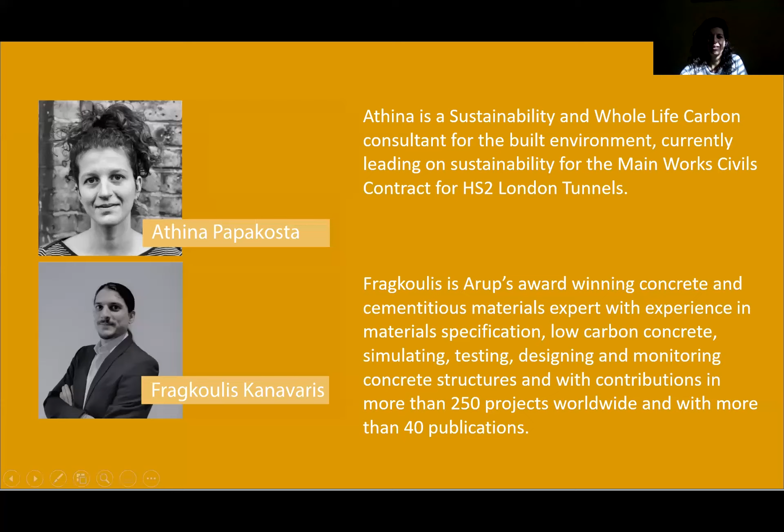Lovely. Thank you, Susan. I will quickly share my screen and make it start. So, right. The pains of having too many windows open. So there we go. I hope that you can see my screen all right.

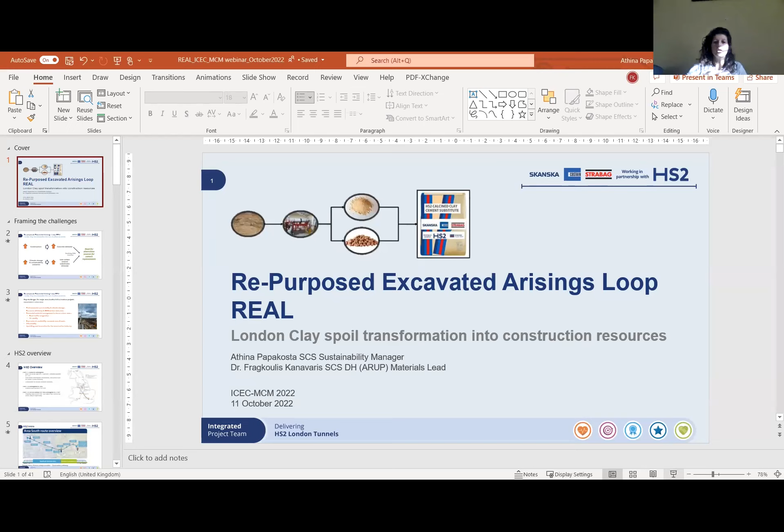So as Susan mentioned, we're going to have a quick recap, a quick summary on the so-called REAL project, which is the feasibility study we're running as part of the HS2 delivery contracts to look into how London clay spoil can potentially be transformed into useful construction resources.

So a bit of background on that, which may as well be common knowledge to most of the audience. Growing construction globally means growing demand for concrete. That is one of the building blocks of construction. At the same time, increasing sustainability and planetary change challenges in our environment, with climate change being one of the most salient ones in our days. These in turn dictate more low carbon, more environmentally friendly solutions.

Looking at these two in conjunction, the need for robust concrete materials to essentially keep supporting global growth and also go hand in hand with sustainable development and the provision of lower carbon alternatives in order to meet the requirements to reduce and minimize our emissions and reach net zero by 2050, we're faced with a particular problem in the world of concrete. We have to look into solutions with alternative cementitious material, given that cement is the most carbon intensive constituent in our concrete.

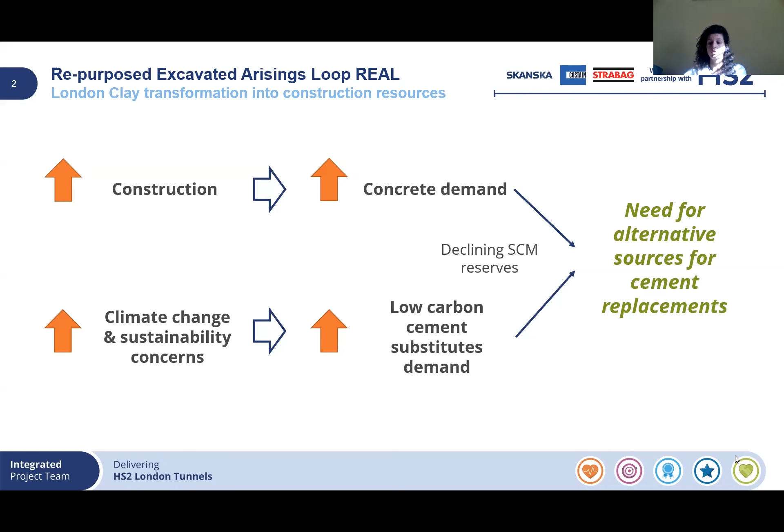So moving on, when we're looking at infrastructure projects specifically, moving away from concrete as a whole, there's also a number of major challenges, as you see on your screen, that have to do with the overarching environmental sustainability and climate change aspects that revolve around overall resource efficiency and carbon emissions, and excavated material management, which can get even more tricky when we're dealing with urban and densely populated areas.

This obviously leads and links into road traffic congestion, air quality considerations, so on and so forth. There's also obviously the challenge, especially when we're talking large scale, with raw material availability, there's affordability, there's also upskilling and innovation that is in dire need in the construction industry. So very broad brush lines with regards to infrastructure projects specifically.

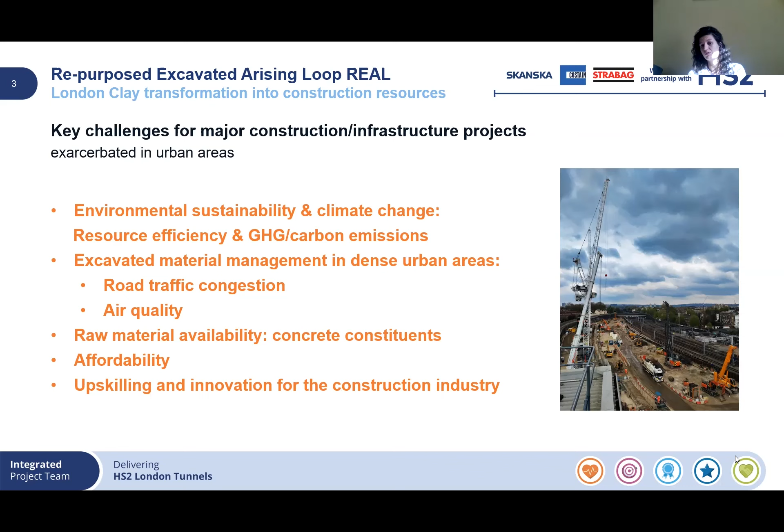Quick introduction to our specific infrastructure project that is essentially hosting this feasibility study. We're looking at HS2, a key infrastructure project, railway project currently underway in the UK. Phase 1 is down here linking London Euston to Birmingham. Few more details on the left-hand side. So currently we're talking essentially this stretch down here, and our particular contract is linking London Euston to essentially the

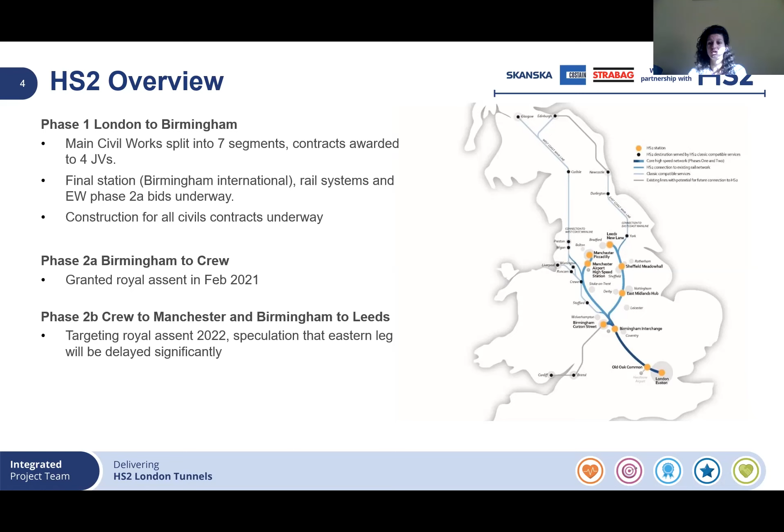northwest end of London. And as you can imagine, it being so very densely populated with not much space above the ground, our project consists of mainly tunneling works, and hence excavation material is one of the key aspects we have to deal with.

So zooming into the stretch that we're dealing with, this is just a more detailed overview of the project, which is pretty much tunneled from the beginning at the Euston station all the way to pretty much the end, where trains come out of the ground for a very small stretch, and then we're handing over to the next contract. So as you can imagine, around about 40 kilometers of tunnels, associated shafts, a lot of excavated material.

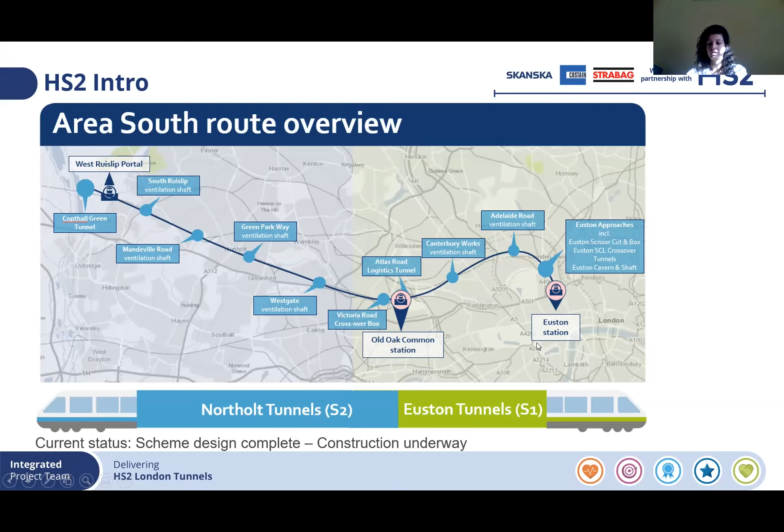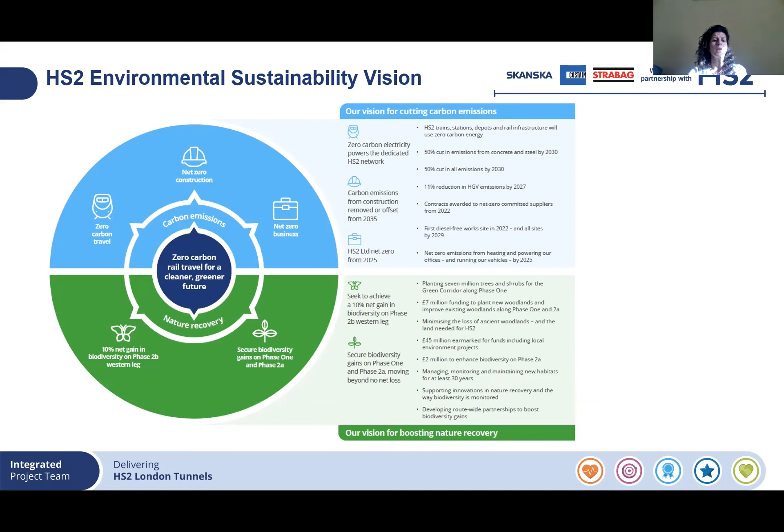HS2, as the client and as the entire program owner, in their own right have very high ambitions with regards to the environment. I'm not going to dwell on it too much. I'm just going to highlight that there's specific rigorous considerations, targets, and requirements, specifically around carbon emissions and nature recovery, including resource efficiency. There's also a net zero carbon plan available in the public domain for more details, so on and so forth.

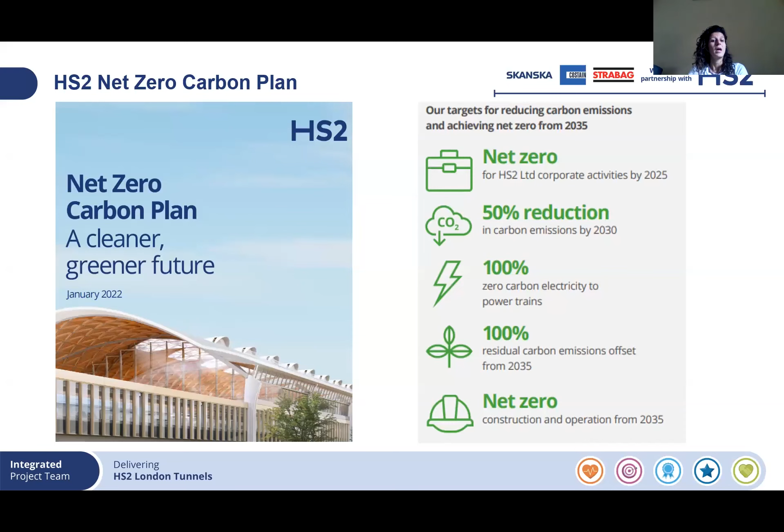All this just to stress that there is a strong drive over and above just the ambitions of our own joint venture and our own parent companies, from the client as well. That is very important and is supporting innovation projects like the one we're going to talk about. So a bit more specificity on the client drive.

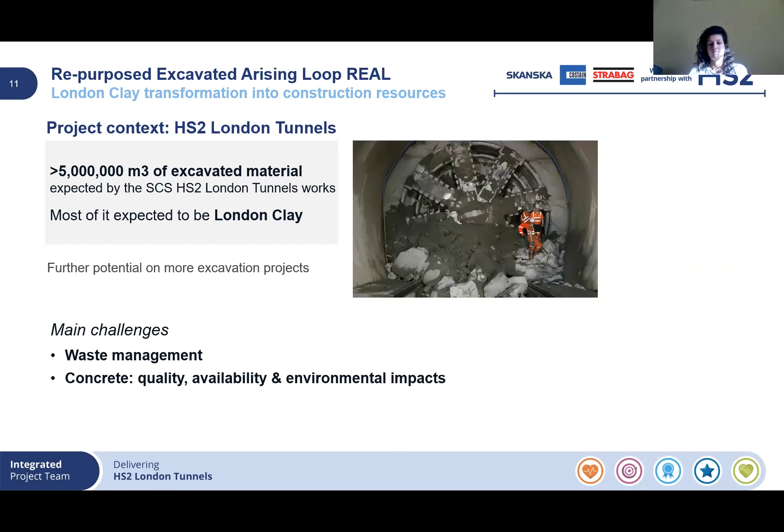So focusing on what our specific parameters are, we're talking around about 5 million cubes of excavated material for our project. Most of it, given the location, is expected to be London clay. So main challenges we have to deal with is obviously waste management, excavated spoil management, as briefly touched upon earlier. And of course, we have a huge demand for concrete to build the tunnels and the auxiliary structures and the heavy geotechnical structures to support the function. So concrete comes into play in terms of quality, availability, and of course its embodied environmental impacts.

So key objectives when we started looking into this feasibility study had to do with these main challenges. So we zoomed into how can we make the most out of our excavated spoil, that is London clay in this particular case, so essentially waste repurposing. And should we be able to make something useful out of it, we would be offsetting the use of imported materials with site-won ones, and therefore avoiding waste and the associated disposal, with the accruing benefits around resource efficiency, carbon emissions reduction, potential for cost savings and improved air quality, and less nuisance for the surroundings.

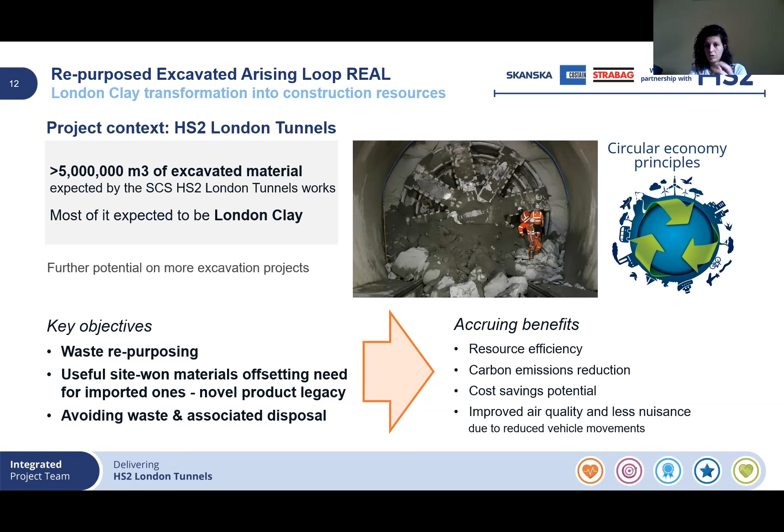So following basic circular economy principles to make the most out of what would otherwise be pretty much a waste stream, our London clay excavated spoil. So, as mentioned already, we wanted to investigate the potential of turning this excavated London clay into useful derivatives for construction. Main focus resides with supplementary cementitious material, that is calcined clay, and calcined London clay in this particular case. Frag is going to go through a lot more detail around calcined clay per se, but this is just to state that this is a main focus.

We've looked into expanded clay as well, that can be used as a lightweight aggregate, and have actually had quite promising results on that front too. But with respect to our particular project and the scale of the global challenge, concrete and therefore the supplementary cementitious side of things, the calcined clay, is bearing the lion's share of our attention and focus at the minute.

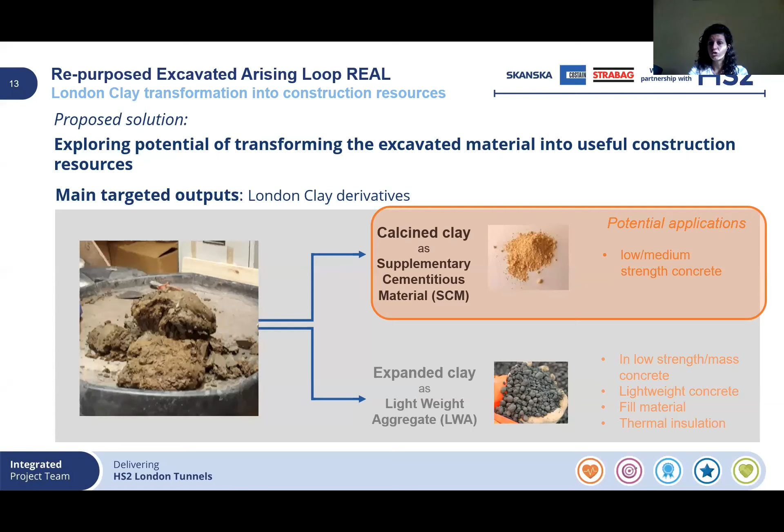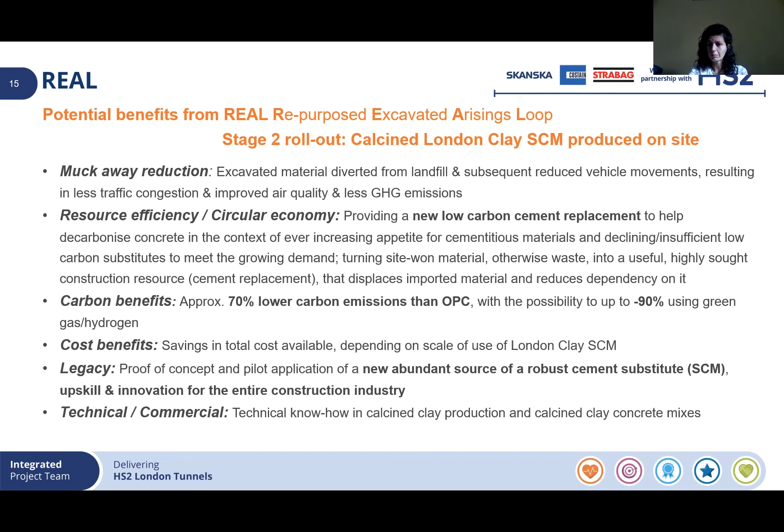So moving on, again very quickly, key benefits that I've already touched upon around muck-away reduction, resource efficiency, embodied carbon reduction, and potentially cost benefits and legacy, as well as technical upskilling advantages. So in order to look at this in more detail and more systematically, we have drafted this modular feasibility study to delve deeper into the potential of London clay.

And during that stage, we tested several samples of London clay with regard essentially to the material characteristics and whether they would actually constitute a good source for calcined clay. So we tested around about 10 samples from across the stretch, and got pretty promising results, which allowed us to move into stage 1B that is currently ongoing, which is the actual concrete feasibility study, where we essentially got bigger quantities of London clay, this time from our works, to rerun material characterization to essentially verify the prior intelligence,

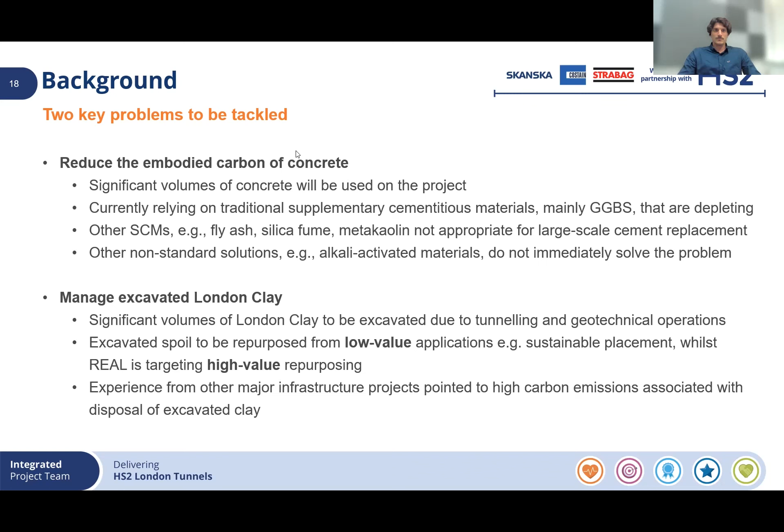Next slide, please. Yeah, sorry, maybe we'll have some delay, but that doesn't matter.

So when we were thinking back about the possibilities, I think it was already 4.5 years ago, we were thinking, what can we do with that clay that is going to be excavated? We were aware of previous work using that particular clay to produce expanded clay aggregate, not necessarily for use in concrete, but for other applications. But we had the idea of investigating the clay further and calcining it to use as supplementary cementitious materials.

So a lot of people and partners, when they heard this idea, were not very supportive or very happy, but it wasn't something that came out of the blue to us. We had past experience and past evidence of clays being used as supplementary cementitious materials. Calcined pozzolans from the ancient Roman and Greek times. In Brazil and generally South America, calcined clays were used in massive concrete structures like dams to fill large concrete volumes. We have been using metakaolin.

Oh, sorry. Could you please mute your microphones?

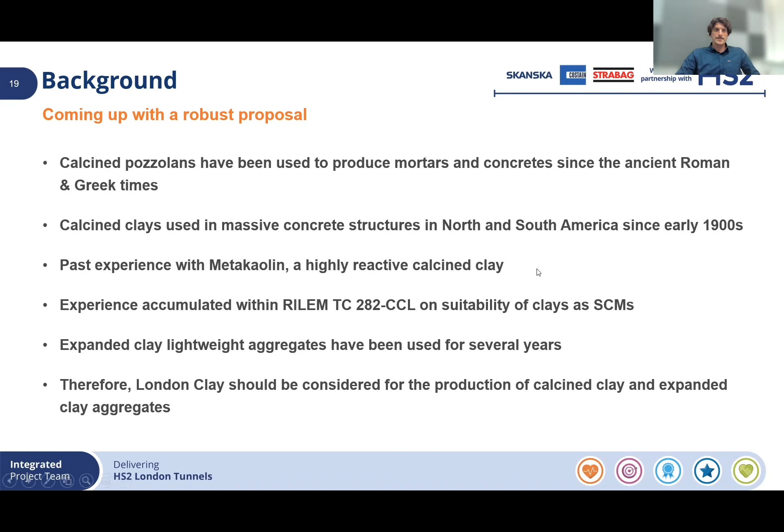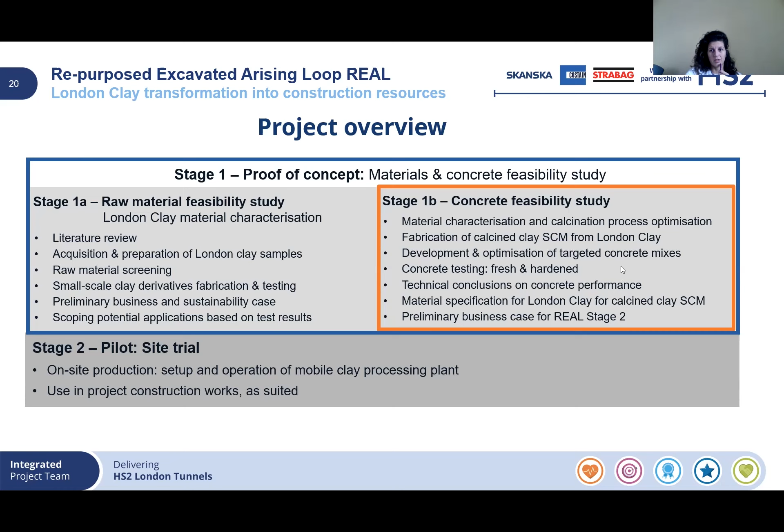Sorry about that. It takes its sweet time for some reason.

Sorry, could you please go back one slide? Sorry about that. I was trying to be proactive.

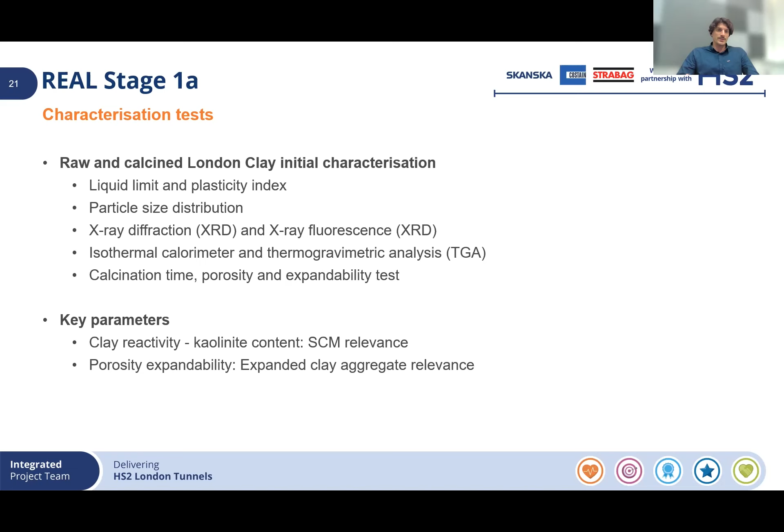So the key parameter for supplementary cementitious materials for clays is the kaolinite content, because this is an indication of the reactivity of the clay and how feasible it would be to use the clay in concrete. And the parameters which are key to expanded clay aggregate production are the porosity and expandability. So now we're moving to the next slide, where we see some of the first results that we obtained a couple of years ago.

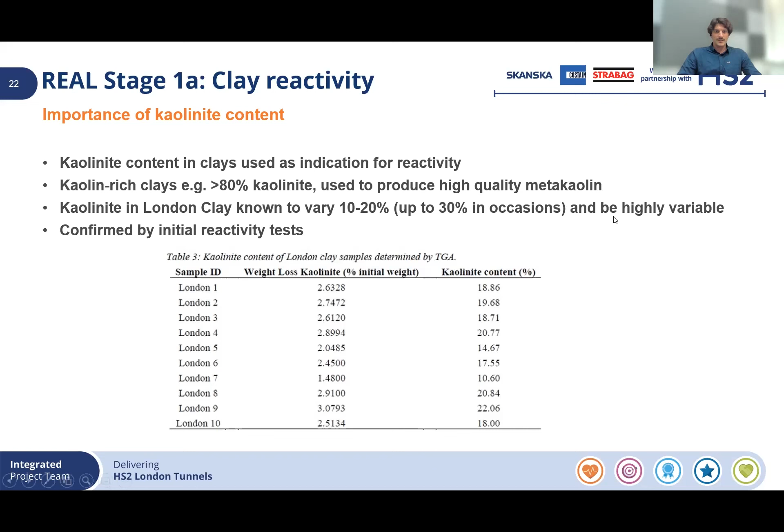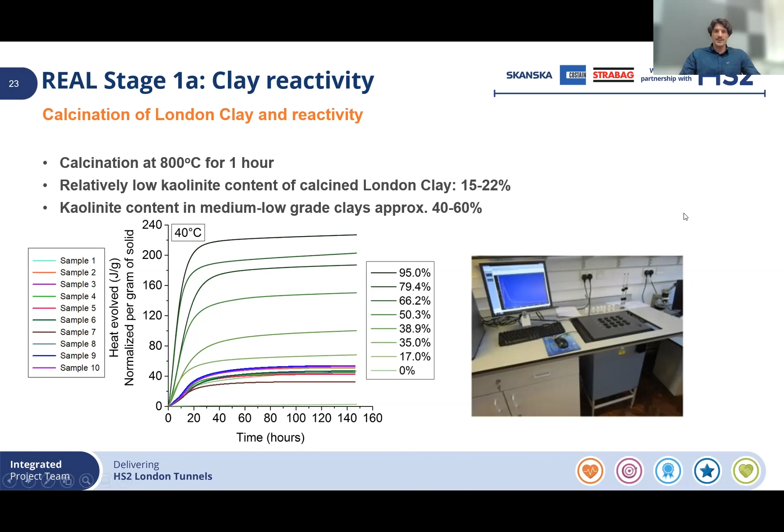So comparing these results that we got with existing literature results, in this figure, the green lines represent kaolinite contents, and the colored ones represent our samples. So we are in the lower end of that graph. We're approximately 20% or even 22%. So it's not something that we were not expecting. It is something that we confirmed after calcination. And this is considered a low-grade clay, low-grade in terms of its potential for use in concrete. Next slide, please.

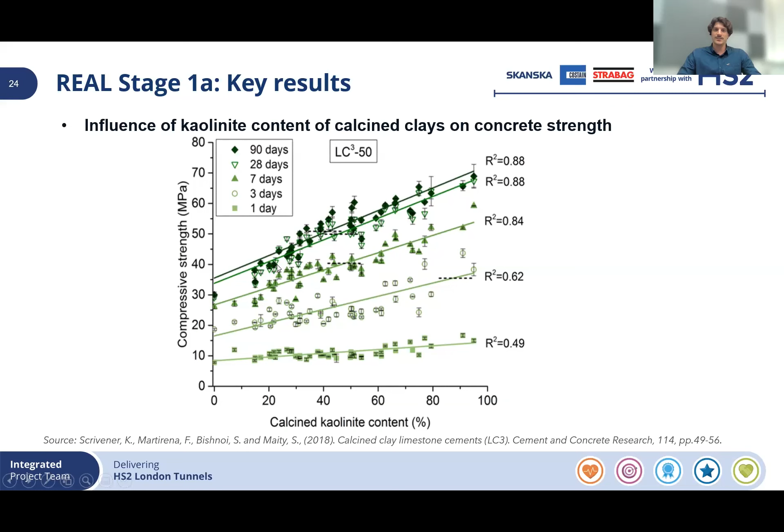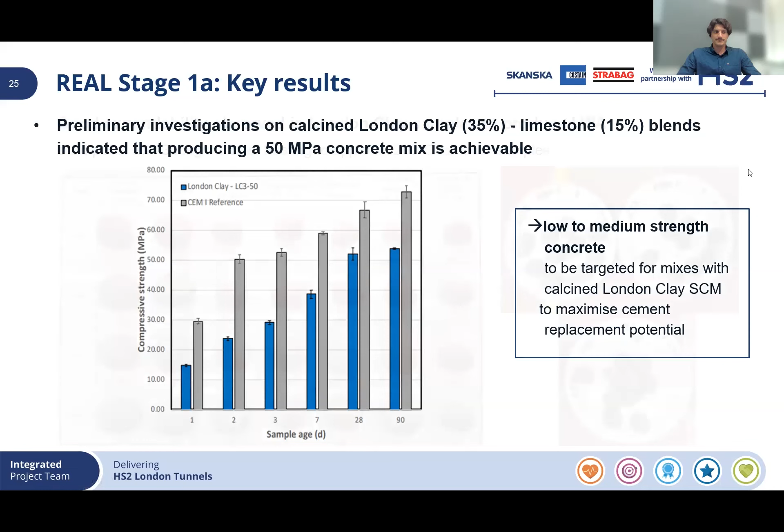So the summary for stage 1A was that we obtained satisfactory results in terms of using London clay as a cement substitution, but also if we want to produce lightweight aggregate, it is also possible. We knew that London clay had relatively low kaolinite content. We confirmed that with tests, but we also showed that it's not a limitation in terms of using it in concrete. So we decided to start targeting the highest impact potential applications, such as development of mixes with high replacement rates and low strengths. Next slide, please.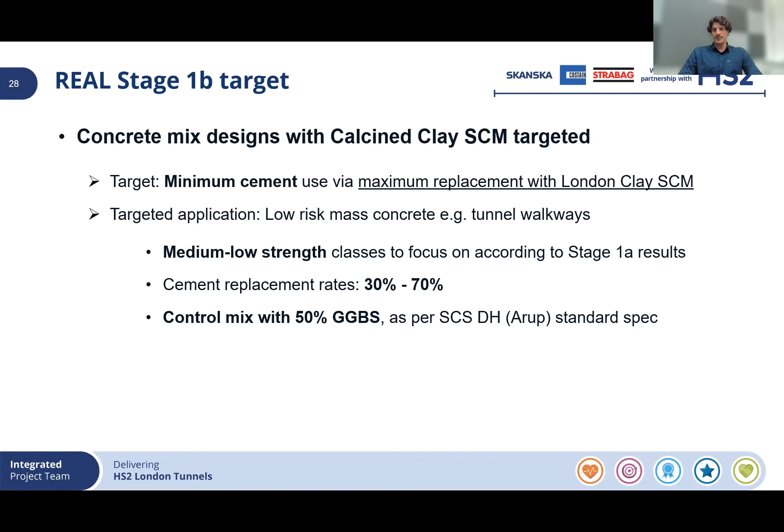So the mixes that we are targeting were aiming to minimize cement use, to use the absolute minimum cement content. For example, if we could use 280 or 240 kilograms per cubic meter, we would be happy with it, and target the low strength applications, which means approximately 20 to 25 megapascals at 28 days, with cement replacement rates with the calcined London clay varying from 30 to 70%. And we would compare the results to our standard 50% GGBS mix, which is the mix that's been used as a control mix throughout. It's a minimum standard specified mix in HS2, at least for the contract that we are involved in.

Next slide, please. So again, we derived a large set of tests and a systematized investigation. It started with raw material preparation, like collection of London clay samples. Athena herself went on site and dug out some clay from the excavation. That was quite an encouraging moment for the team, and then we carried out the preliminary testing, some of the microstructural tests we mentioned before, proceeded with calcining London clay, grinding it, and now we're reaching all the way down to mix development, where the University of Leeds and Susan's teams helped us a lot. And currently we are carrying out trials on actual concrete mixes that are supposed to be used in the project. Next slide, please.

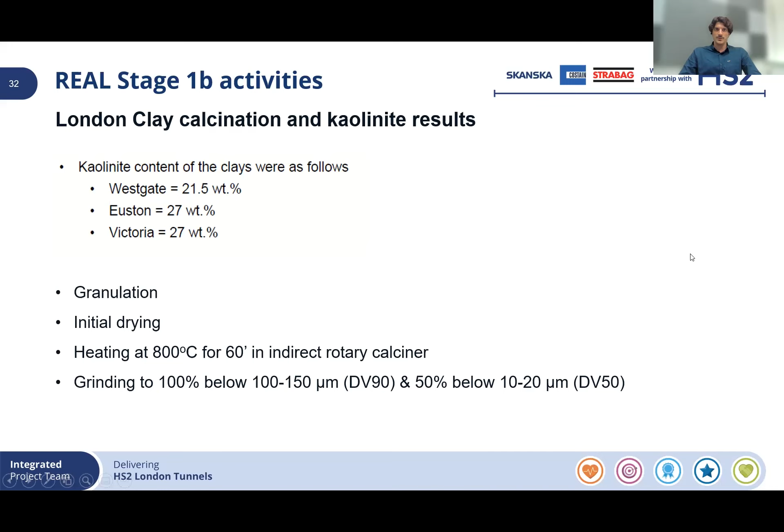So some of the initial results that we obtained, we were happy to see that we have more kaolinite content in the samples that we're investigating as part of stage 1B. We can say that this was somewhat expected due to the variability of London clay across the London basin area. And our works involve granulation, drying, heating, of course, calcining in a rotary calciner, and grinding to a specific particle size distribution. Next slide, please.

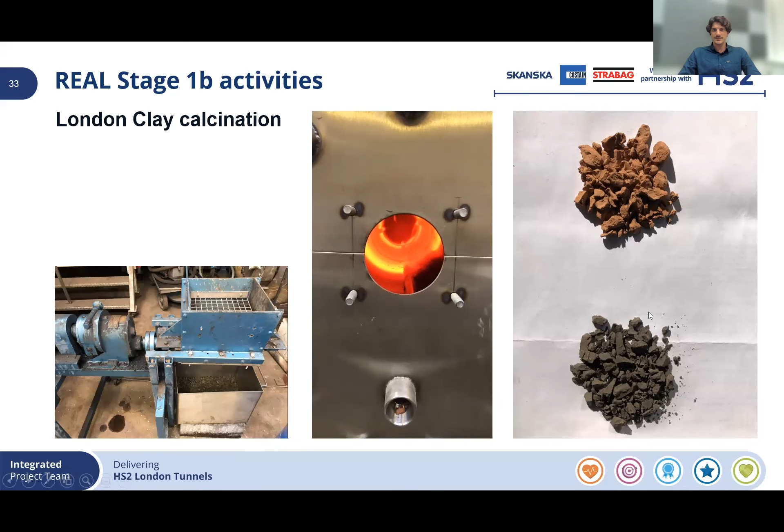So here is some evidence of the calcining process. Athena can play this wonderful video. If it doesn't play, doesn't matter. Okay. Of course it does. It looks like a washing machine. Yeah. It's just much hotter than that.

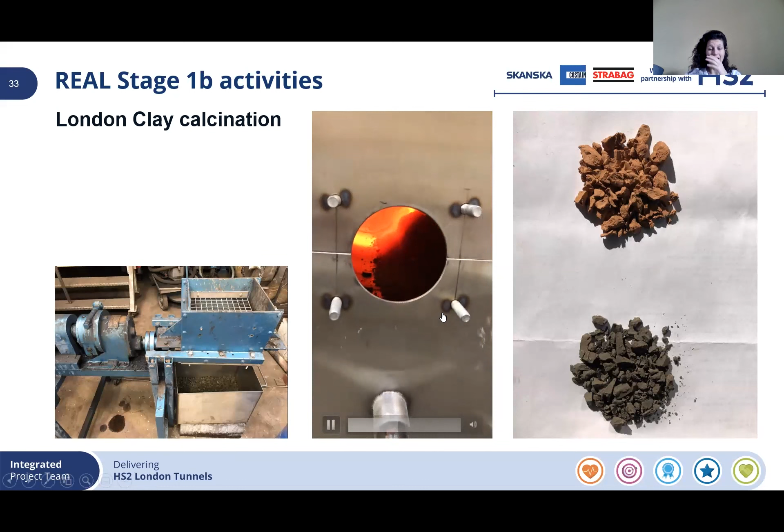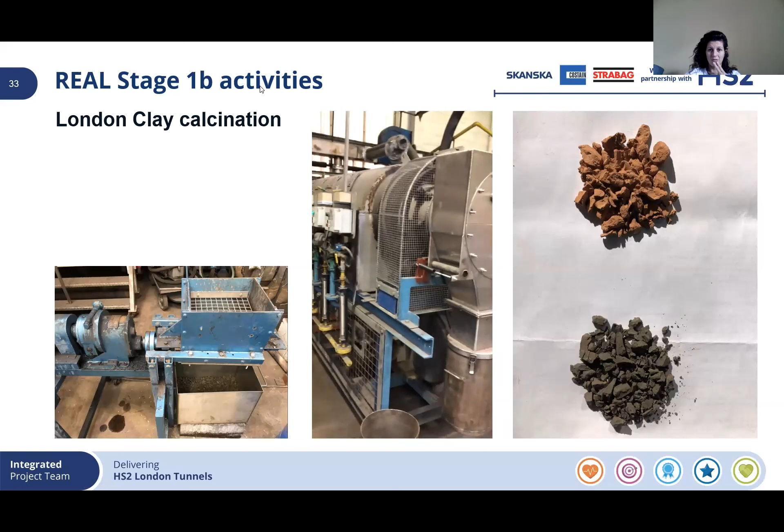But yeah, this is the industrial process at this stage. So this is at the facilities of one of our external partners, where we send around about 200 kgs to be calcined and then ground. Shall we? Yeah, okay. So this is all fascinating stuff, especially considering that it started as a crazy idea, and it's very nice to see that. So next slide, please.

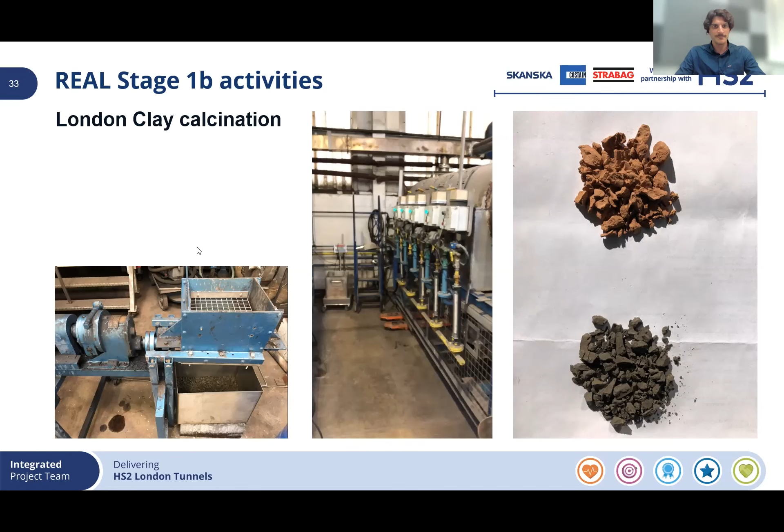So our approach to mix development first was, as we call them, binary blends. So we want to use just Portland cement and calcined London clay. And as we said, we're targeting low strength applications, 20 megapascals at 28 days. This represents a substantial volume of concrete that's going to be used in the project, like for walkways or for mass concrete applications. And starting from the least favorable mixes, for example, those with high water binder ratio, 0.6, and 50 and 70% replacement of Portland cement with calcined clay, and then start considering other water binder ratios and replacement levels as well. Next slide, please.

As a secondary possibility that is probably going to be investigated in the future, we are also investigating ternary binder blends like the LC3 type of blend, where we combine calcined clay, limestone, and Portland cement, to see how we can benefit from the synergistic effect of limestone working with calcined London clay, and what kind of strengths we can achieve. Our target strength is the same as before.

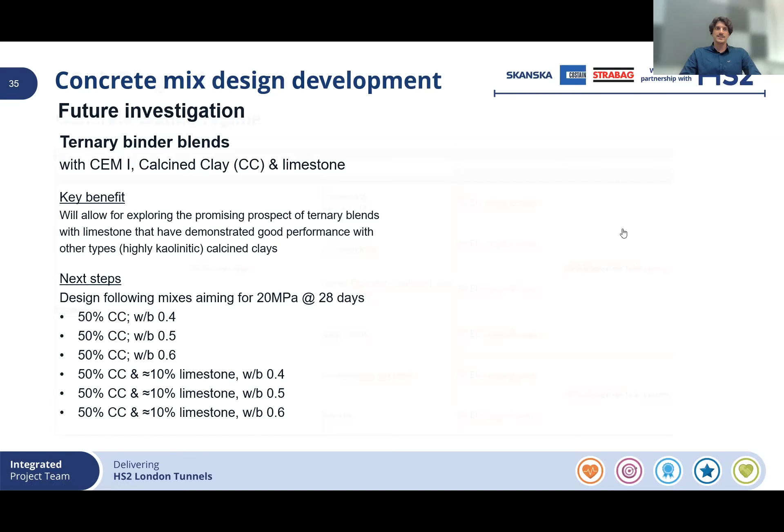Targeting the low strength applications, which are also the lowest in risk, considering that they don't contain any reinforcing steel in the project.

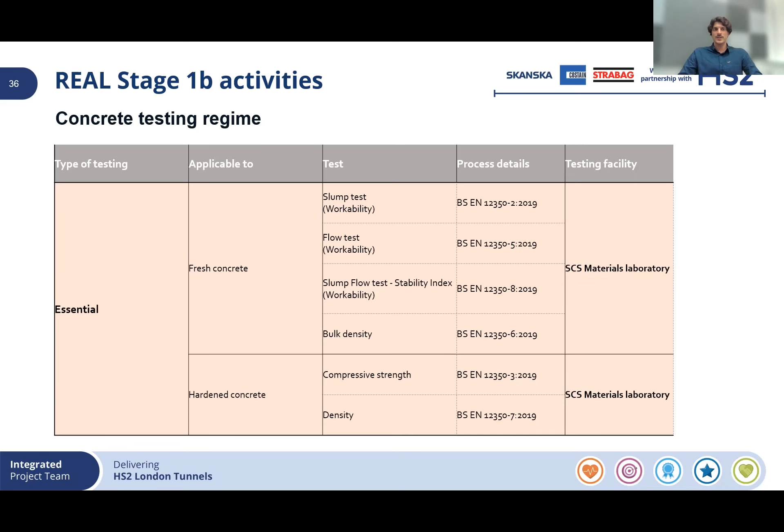The essential testing that we're carrying out at the moment is to determine the fresh concrete properties. Workability is the key one, so we're carrying out slump tests and flow tests, depending on the workability we want to achieve. Density, of course, and compressive strength, which is the key property at this stage.

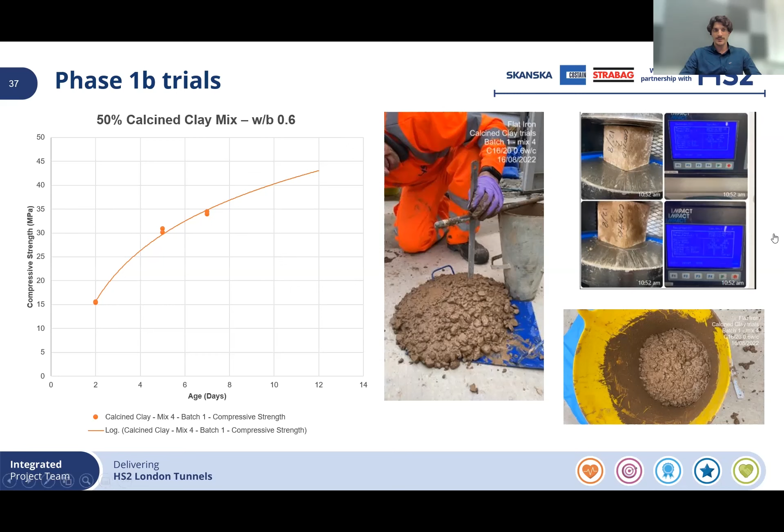So we are completing phase one at the moment, and we're finalizing the concrete mixes. We're still in the trial concrete mixing process. So we're heading towards phase two.

For phase two, we want to identify specific applications within the projects, which are now walkways, inverts, and first stage concrete. These are all unreinforced concrete applications within tunnels, but given that we're getting good strength results, we might even consider structural concrete.

So we want to adjust the mix and conduct additional testing, for example some durability testing if required, get confirmation from SCS and HS2, carry out a more detailed business case including the sustainability and financial benefits to the project, get an on-site processing plant design completed including the logistics, and liaise with concrete suppliers on batching options.

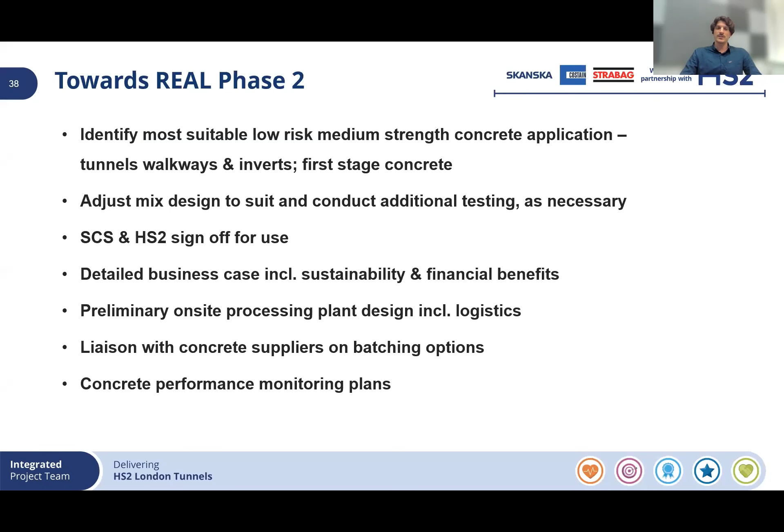We have come up with concrete performance monitoring plans that are already being used in the project, and that can be used for this particular concrete as well.

So going forward, what we had in mind was a very ambitious idea. We wanted to process the clay directly as it comes out from the tunnel boring machine at the excavation point, at the clay collection point. So we have designed a mobile clay processing facility that involves 21 different pieces of equipment, independent but interconnected.

So this is the final stage, let's say, of our project, and we're hoping to start considering building that pilot in the next few years.

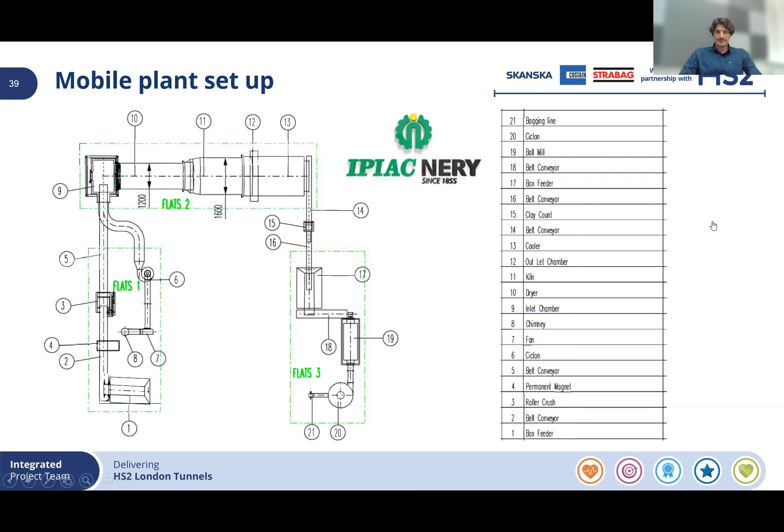So to sum up, sorry if a lot of information is added there. We have indicated that although London clay has a low kaolinite content and is low in reactivity, we can still work around and use it as supplementary cementitious material in concrete. This is not only paving the way for London clay to be used as a supplementary cementitious material, but for many other low-grade clays that can be found worldwide.

We can also use it to produce expanded clay aggregate, although we already knew that to an extent. Preliminary tests with the LC3 type of binder reveal that we can go up to 50 megapascals. But now with the new binders we are considering, with 50% or even 70% calcined clay replacement, we may be able to achieve these high strengths with a binary binder formation like Portland cement and calcined clay only. We have an ongoing testing program, as I mentioned, to finalize the concrete mixes.

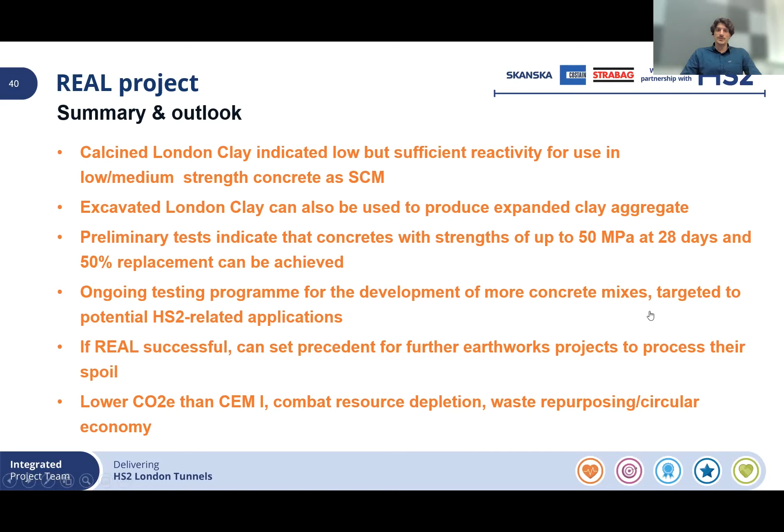And if we are successful, which I think I'm allowed to say at this instance that we have good chances of being, at least in terms of technology, we can set the precedent for further earthworks projects to process their spoil, reduce landfilling, and reduce associated CO2 and resource depletion with infrastructure development. Thank you for your attention, and we open the floor to comments.